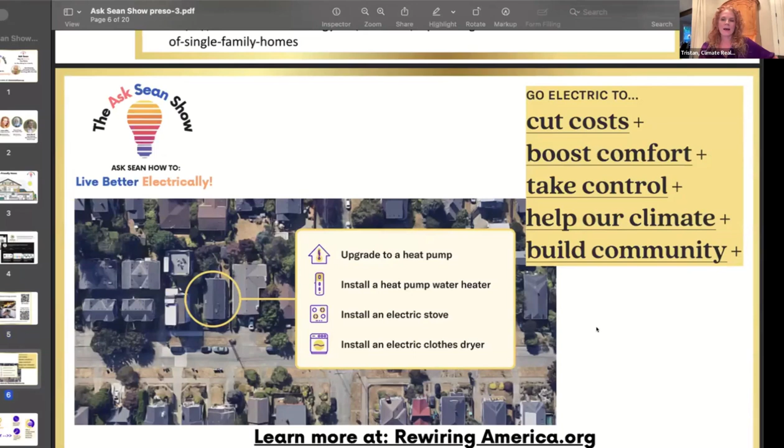And why do we electrify? There's so many reasons why we want to install a heat pump or a heat pump water heater, an electric stove, all those — we want to have our comfort, cut costs, take control of our energy needs, and help our community. It's also for our health.

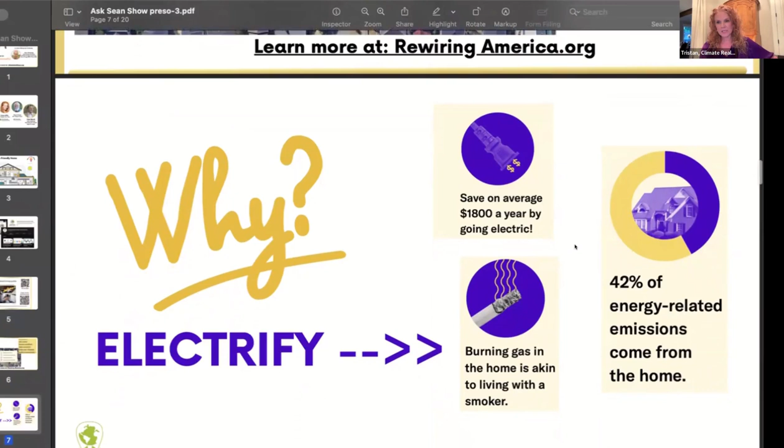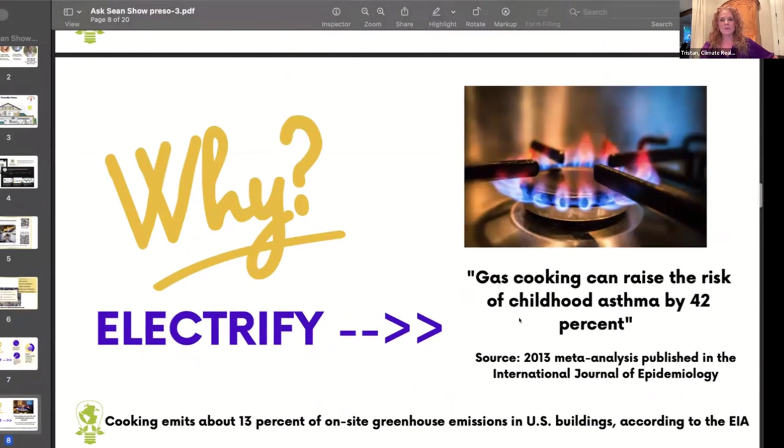We save tons of money on our electric bill. We also improve our health. I've had friends that when they switched out their gas stove for an induction stove, their children's asthma almost went away. So it's really an incredible story there. And as I was bringing up, the whole health of our homes is driven by getting rid of gas in our homes and electrifying.

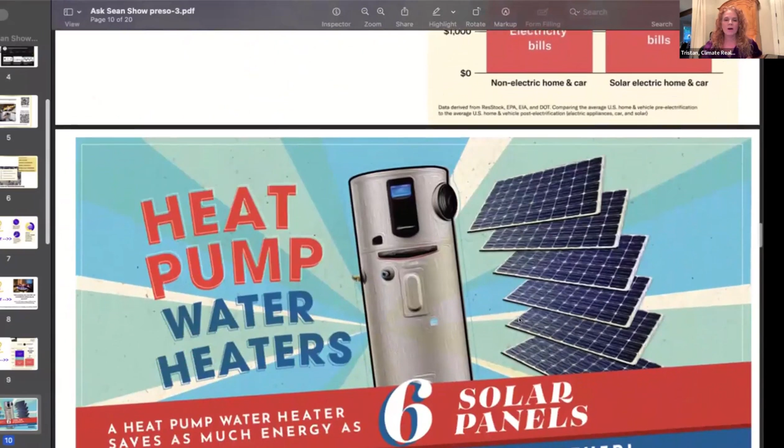Here's a chart that shows the kind of money that you can save when you electrify. This is on rewiringamerica.org, which is a resource we'll be sharing with you. Also, a heat pump water heater is almost like having 6 solar panels.

Hold on, turn it off here. Whoops, let me mute somebody. I think Kat needs to mute.

I got you. And this is Wendy, who was on our first show, who we helped get her very own heat pump. Here she is hugging her heat pump as well, and how after watching the show, she felt more secure and confident about getting a solar company, changing her electric box, her electric panel, and getting a heat pump water heater. She sends huge thanks and has been on our show several times since then.

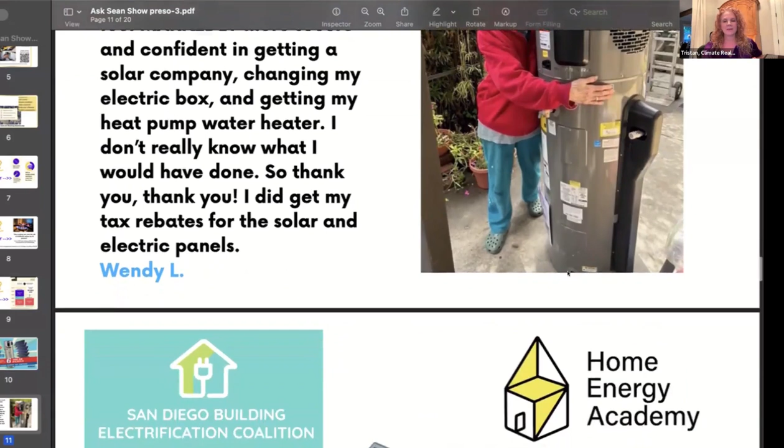And today we're going to be checking out Henry's house in Oakland, California, built in 1908. So we're going to let Sean take it away.

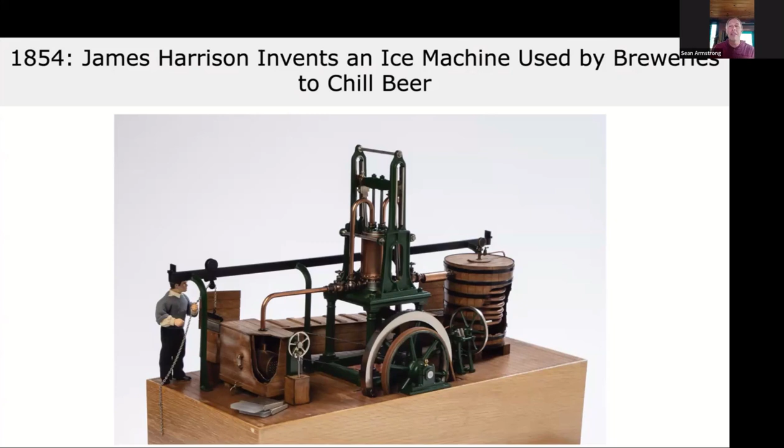The world's breweries use it to make ice to keep beer cold, and they were the number one innovators and investors in this vapor compression cycle technology. It used to be fossil fueled—they were running huge motors. But today we use electricity. And these two go together.

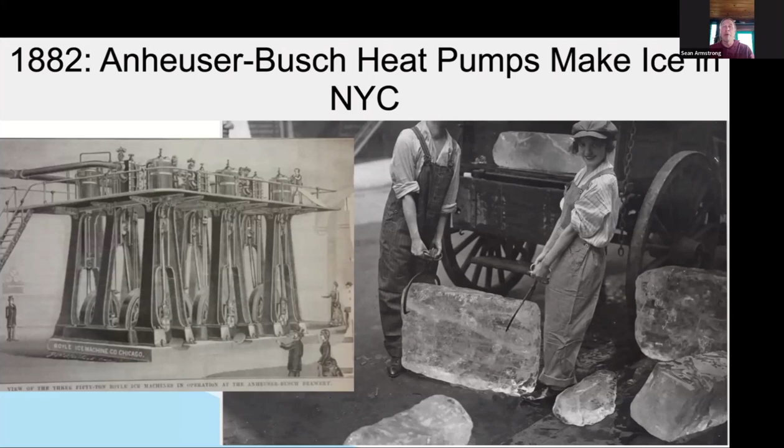Using a heat pump to essentially collect energy from, say, water that you're freezing, or collect it from the air that you're trying to chill—collect the heat out of the air. That process, you can also collect heat from the outside air and bring it in, and that allows you to really collect sunshine energy and bring it into your house, the warm air from outside. So it's a way to get renewable energy into your life. How do you get sunshine into your water heater, sunshine into your space heating? Use the vapor compression cycle to pull heat in.

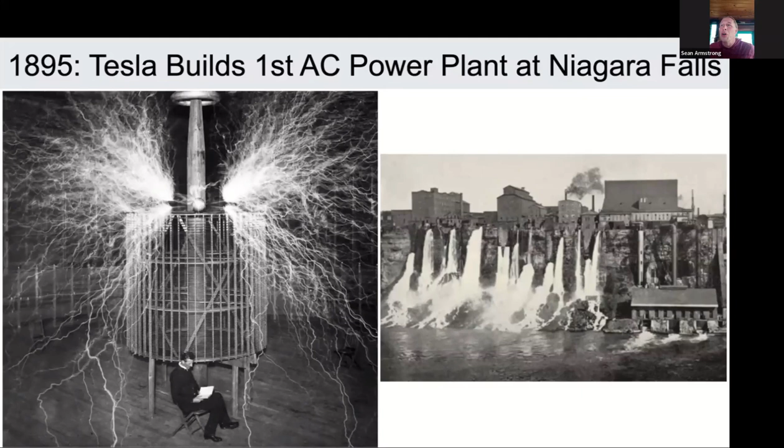Okay, we'll give a little credit to Niagara Falls. It was one of our first hydropower plants in the United States, and Tesla was hired. You see him sitting there next to this Tesla cage, once again demonstrating different ways to use electricity safely. You can see the power plants there on the right-hand side that Tesla built.

So here, transportation electrification. This is a big deal to understand where we were and where we're going. In 1894, the longest distance vehicle on the planet was electric. It could win a 5-mile sprint. And they had 600 of these electric cabs in New York City. They would take them to an ice rink and trade out batteries.

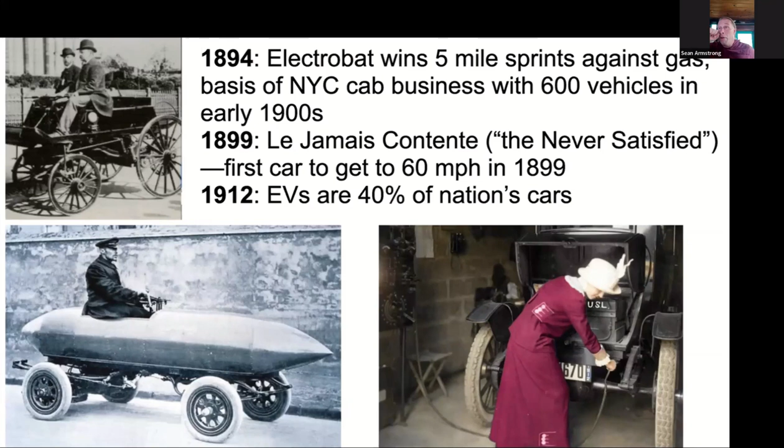In 1899, Le Jamais Contente, the 'never satisfied,' was the first car to reach 60 miles per hour. Then in 1912, 40% of America's cars were electric. We were almost there. Then spark plugs came in, I kid you not, meaning no longer having a hand crank but instead having a battery. So essentially making cars hybrid was a way to solve a lot of the issues hassling gas vehicles that didn't have a way to electrically explode gas. So hybrids we've had ever since have been part electric, part gas.

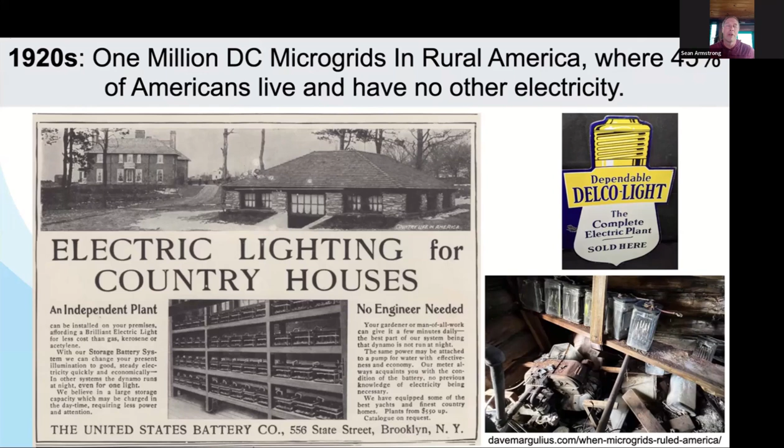Next slide. In rural America in 1920, 45% of Americans didn't have electricity, and they lived in rural areas—only about 1 in 10 rural households had electricity. So there were 1 million microgrids in our country, huge battery banks in people's homes, fueled by a gas generator or a wind turbine that stored electricity in batteries, giving them lighting at night, which was the big one. Everyone wanted electric lighting.

It was a huge relief. Heat waves today are 6 to 10 times more common than when I was born, depending on the study, but it's a lot more heat. So I'm glad that we have air conditioning. Next slide.

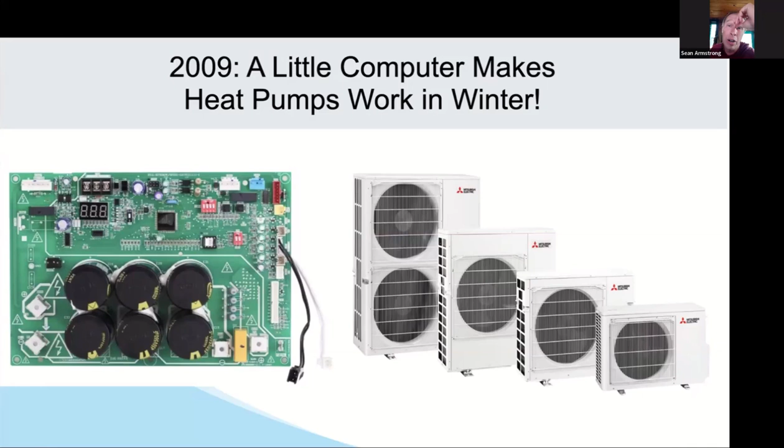Well, when computers got added to air conditioners and heat pumps, which are reversible air conditioners, that meant that they could work in the wintertime. They could have the fan speed up and the compression cycle speed up with a computer. Whereas before it was just single speed, like an old-fashioned bicycle that you just stomped the brakes on or you went forward - that's how old-fashioned air conditioners were, either on or off. But with a computer, now you can set whatever temperature you want inside, and it can accelerate or decelerate the process of collecting heat so that it can operate outside down to -30 Fahrenheit and during incredible heat waves up to 135 degrees Fahrenheit. Old air conditioners would die at about 110, 115. So computers are letting us stay in our homes during bad heat waves these days.

I want to show you how important this is. The gray line is the electricity demand over the course of a day from pre-retrofit homes in Sacramento, 700 of them. You see the peak happening at 1600, 1700 hours, like 4 to 5 in the afternoon - that's the peak for air conditioning.

Sorry, the orange line is the pre-retrofit summer peak. The gray line is the post-retrofit line, after they put in a computer-based heat pump, where the peak in the summertime goes down because it's operating more efficiently. The blue line represents how, in the wintertime, there's now an electric peak in the morning - people heat up their homes when they wake up, and you see a morning time winter heating peak. What's important is that because the computer is so efficient, not only is the gray line in the summer lower, the blue line in the wintertime is still lower than even the gray line in the summertime, and obviously lower than the orange one.

What it means is that these old-fashioned air conditioners, when replaced by a modern computer-driven heat pump, it helps the grid. It makes air conditioning more efficient, and the new winter electricity load is smaller than the air conditioning load, meaning our grid is still sized - all the wires and components are sized right - for electrifying our homes with heat pumps. This is a great 700-home example of how the greater efficiency of modern heat pumps helps the grid. Some people think electrifying your house will harm the grid. No - like 80 to 90% of Americans have air conditioners, and installing a heat pump helps our grid by reducing their energy draw.

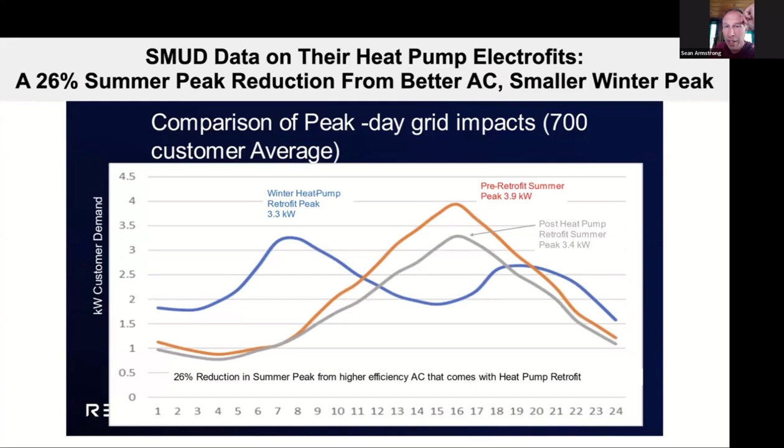I love this. The Propane Education Research Council freaked out in 2014, hired consultants, and in 2016 this came out - a map showing in yellow every county where fuel was going towards electricity for space heating and water heating, and it's everywhere. This is before there are any policies. It was just market driven because it's cheaper to build all electric.

It's thousands, if not tens of thousands of dollars cheaper to build all electric, and it's simpler, goes a little faster, because every appliance is electric, even if it burns gas - it has electricity delivered to it. So you have to wire to every appliance in the house, and then you have to add gas in new construction. If you just made it all electric, you only had to wire and then you're done. So you see the natural phenomenon in every state.

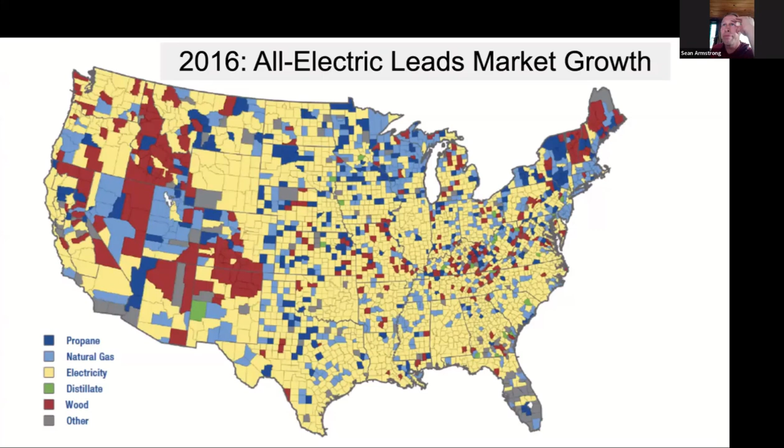Same story - people, because we have democracy in our cities, had the ability to pass laws to ban gas. We got 80 cities to pass them. Then Trump appointed judges who overruled us in California, and judges on the East Coast overruled them too, saying it is legal for cities to ban gas, particularly for air pollution reasons - that's within their public health and safety charge. The city of San Francisco still bans gas in new construction, even though the court ruled on different grounds for different laws that you couldn't. There are ways around it.

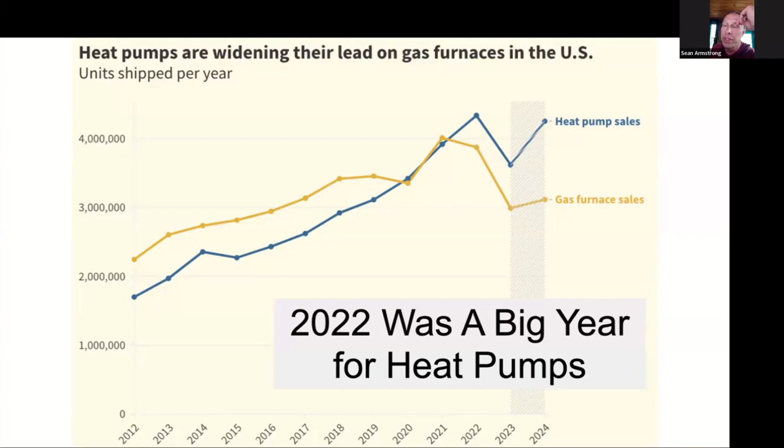This same illustration is true globally. Everywhere in the world we've woken up to the fact that electrification is how we get rid of fossil fuels and save our wildlands and our oceans and so many different things impacted by climate change, and our own health and safety.

And this is also happening in California for vehicles. I started off showing how electrification and vehicles worked together. Then we had a long period of hybrid homes - both electric and gas - and hybrid cars, with batteries and gas. Now we're moving fully back into electrification.

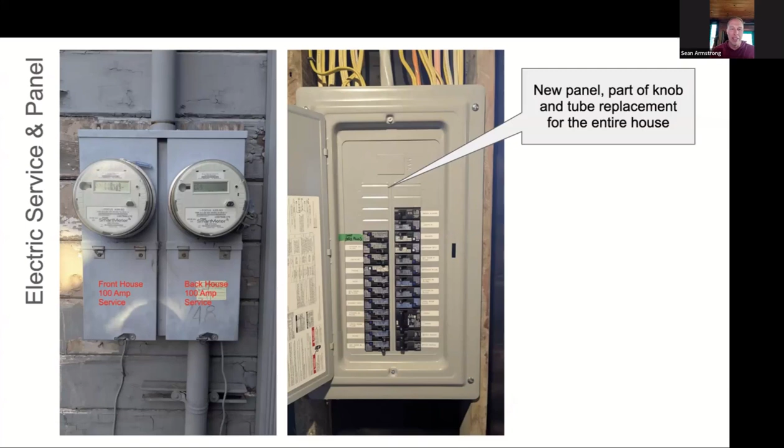Exactly. Okay, then we'll do the next slide here, noting that these are 100 amp services, right? They are, though I don't actually know if they're limited by the wire size—the meters themselves might be higher, but there are 100 amp breakers in each sub panel. In the actual sub panel, about 15 feet from the main service, we had to replace all the wiring in the house because it was knob and tube. We have a large basement, so it's relatively easy to work on. But we have 5 or 6 panel slots left, which is hopefully helpful. That makes it—if you didn't have that, you could put a different panel there for more slots, or put in micro circuits, so one slot has 2 circuits instead of one. There's ways to avoid replacing that metal box, but it's not a nightmare if you did. Okay cool, let's do the next slide—this is what I wanted to show you, a few options.

One way you can plug in anything you want, no matter how powerful, is to use a smart panel. On the left-hand side, there's SPAN. SPAN makes 50-amp and above panels. So if you had a 50-amp panel, you could put in a 50-amp SPAN panel and plug in about 150 amps of stuff. If you had a 100-amp SPAN panel, you could install roughly 300 to 400 amps of stuff into it.

In the middle you have Lumin, a different brand, different cost, same idea. It goes down to 30 amps in this case. You can use it as a sub panel. 30 amps is what you'd power it with, but you can plug in 150 amps of stuff into it.

The deal is that it's extremely rare for everything to be running at the same time at full power. Usually, while you might have 100 amps of service to your house, the 15-minute peak on your house, according to the averages we've seen, is probably like 34 amps in the worst-case moment of the entire year, and usually more like 15 or less.

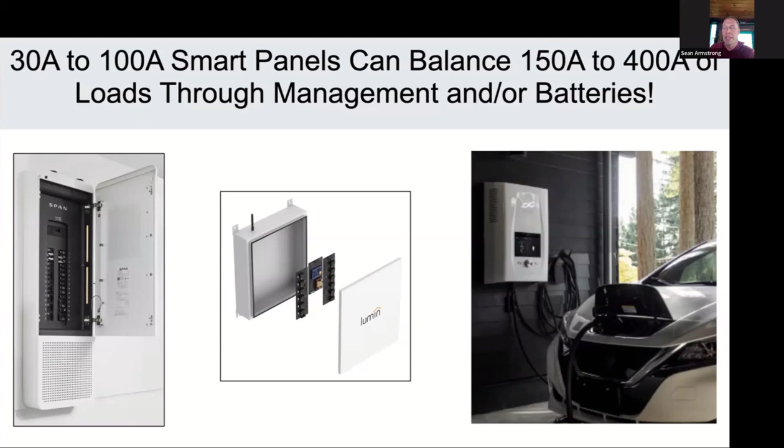These are just smaller versions of that smart panel. These balance 2 circuits instead of all of them. I showed you the one on the left-hand side, the NeoCharge, which balanced the stove and the heat pump furnace in the larger of the 2 homes. These are other examples: Dryer Buddy, SimpleSwitch, Splitvolt, Thermolec DCC, Evduty—all the same thing, where either one circuit or the other is using the electricity, or both at the same time.

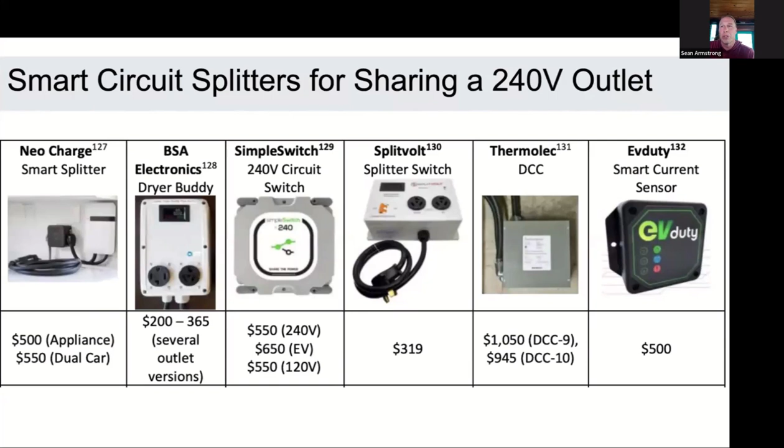The NeoCharge on the left-hand side is a smart one, as is the Thermolec. The other ones, it's just one or the other—SimpleSwitch is a great example: you can either run the stove in that case or the HVAC system. But NeoCharge lets you do both, unless you're using more electricity than the circuit can support, and then it turns off one of them for you.

Okay, next slide is back to you, Henry. But do you have any questions about these smart panel options I just showed you as one way of approaching this? No, very helpful. You betcha.

This slide is really just to show that we've made some of the electrification upgrades already. I installed a heat pump hot water heater. Relatively straightforward, it works great. I had to replace the circuit board because apparently all of them from Rheem are going bad.

And then we put in a heat pump dryer as well. No vents, we didn't have to cut a 4-inch hole in the wall, and it drains into the same drain that the washing machine does. That is so beautiful.

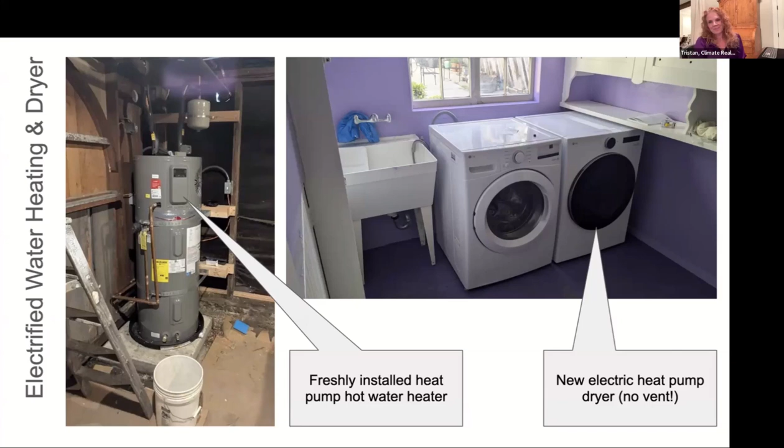And then I want to show you water heaters. So Rheem is the one in the middle that Henry installed. Rheem has gotten a bit of a black eye recently. They really struggled during the pandemic with a lack of access to fans and computer parts, etc. Tons of their, I think, Generation 4 units have come up with complaints, because there was a lack of access globally to fans, which is a critical component of all heat pumps, as well as other circuit boards.

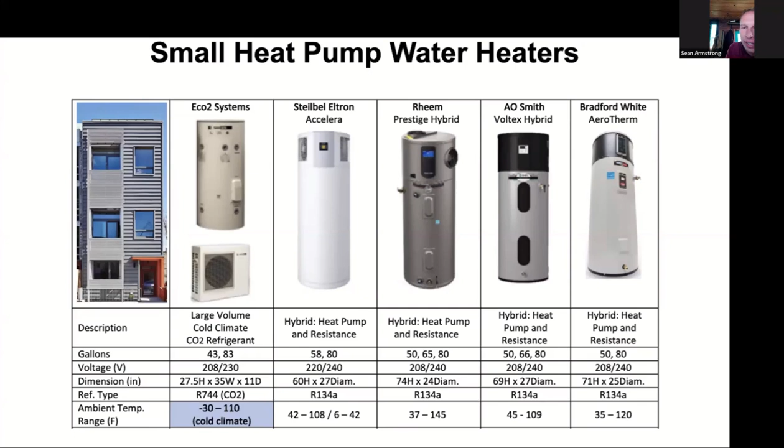There's Bradford White, Stiebel Eltron over on the East Coast, and then the Eco2 or Sanco2 on the left-hand side. Those are if you have a gigantic bathtub, one of those huge eggshell bathtubs where a standard tank of hot water isn't going to fill it, and you need something super big. Those were designed in Japan for their 100 to 150 gallon sitting tubs. So that's a Japanese fancy heat pump water heater just for really big bathtubs. You already have that handled, Henry. I just wanted to let other people see some options.

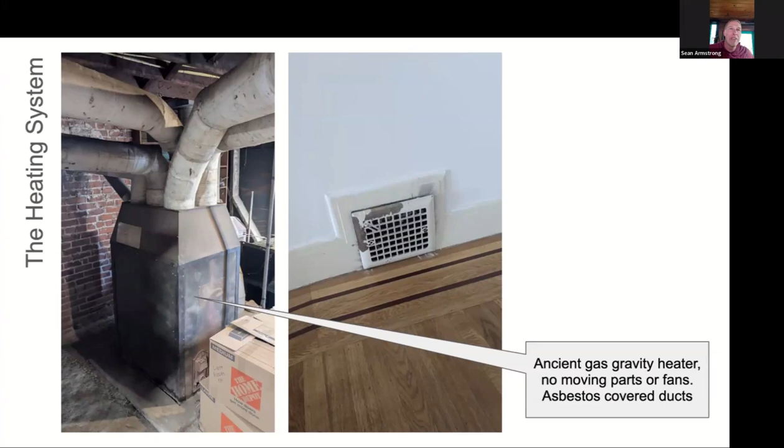And you can't do that with what you have. With what you have now, the whole house gets more or less the temperature that you want it. So when you go to dedicated fan coils like this, you have a remote controlled thermostat and you control zones, and you can split up the house as you wish.

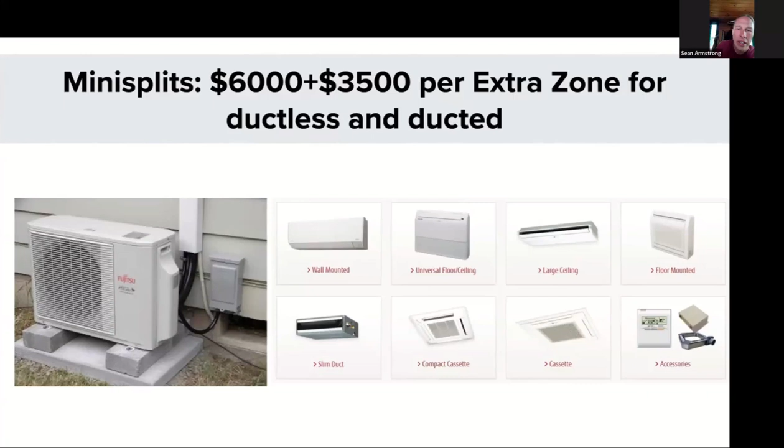Is there concern about air return on those? Because there might not be good return pathways, or there might be, I don't know. No, you don't have to really worry much about the returns on those. They'll each have their own dedicated air supply, a return, air going into it, and then the air goes out. So let's say you have that nice big basement. This would sort of sit right next to that register, and its air intake would be more or less like the back of that box. You'd no longer be using your ductwork that has a bad air intake. You'd be using this device with its air intake right there. Great.

Okay, so then you're on that next slide. Oops, no, the one previous to that, please. So your house, your old super leaky house, how many square feet did you say it was? About 1,600 square feet.

So you want a 3-ton heat pump, 36,000 BTUs, and that heat pump might be too big for your house after you insulate it. It's nice though, because the ones they build today with computers in them, it's not too big, it just turns itself down. Your goal is to get a computer-driven heat pump, not a single speed or a dual speed, so you get a 36,000 BTU heat pump, and it can turn down to say 10,000 or 12,000 BTUs, which is great, before it has to short cycle, meaning turn on and off. So I think this is probably the right solution for you.

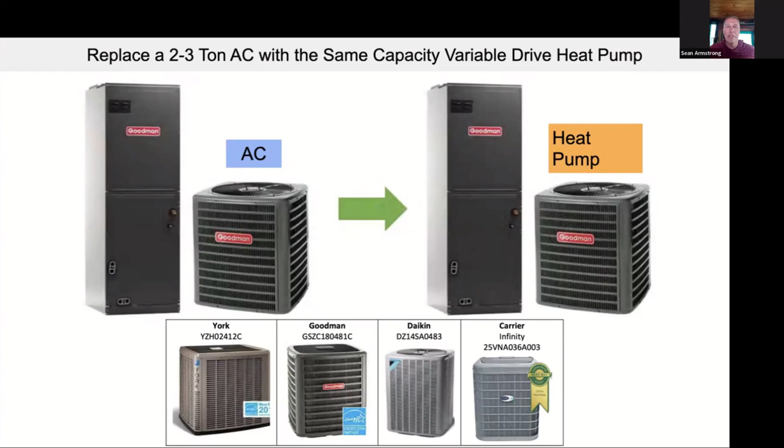Okay, let's go to the next slide, your stove. Yeah, I guess the only gas left in the house is the furnace and the stove, and we kind of took everything out of the kitchen, so it's a free-floating stove. I think we have a lot of flexibility there, and you can kind of see we put some temporary tables beside it.

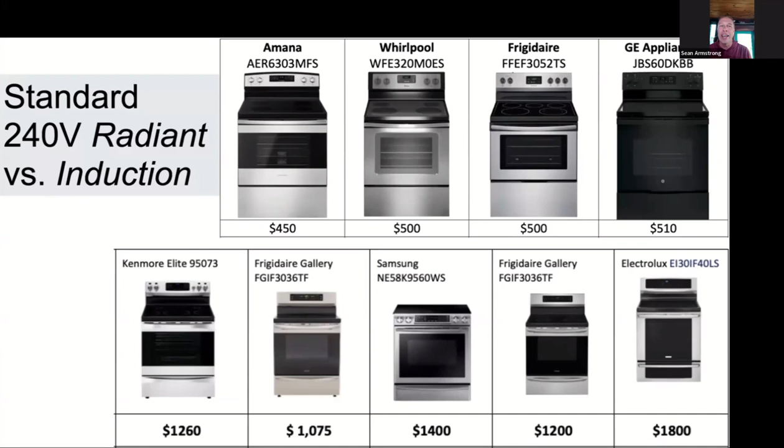And that is my last slide, and we're right at 6:30, so do you have any questions, Henry? I appreciate all the input, especially on the HVAC. That's going to be the challenging one, I think.

Well, stay in touch, send up bids when you get bids for them, and I'll review them and point out, like, well, they're proposing a 4-ton system. I mentioned that you don't need more than 3 tons, and every ton is like $7,000 of installed cost. So when the HVAC contractor comes with the most expensive part of electrification, 3 times, 4 times as expensive as any other thing you're going to do, and they oversize your system oopsie whoopsie such that they get thousands of dollars more profit for the exact same amount of work that they did, that's how you lose your shirt. So just insist that you don't want more than 3 tons, you don't care what they say.

Appreciate that - I think that's the type of conversations I'll be having. Well, I have a friend trying to meet me for dinner here in town. Is there any other questions from folks before I jump off? Real quick, I don't know if there's anything else.

We'll send some more ideas for inverters. We shared some - people wanted a cost range for the inverters. Inverters are like 2 to 3 grand in my experience.

Kat says she's using an induction cooktop on the counter with 120 volts, a 2-burner, and only one would work full force, so cooking 2 pots at the same time isn't realistic, but she didn't have to switch to a 240 volt circuit. I wonder which brand she's using. With 1800 watts split into 900 and 900, in my experience my food fries to the point of burning at about 600 watts. I can't cook with much more than 600 watts for most of my stuff - 900 watts is certainly more than enough. When I'm boiling, I like to have all 1800 watts because it goes faster, so with 2 burners it's not as fast, but it's literally just as fast as a gas stove. 900 watts on induction is as fast as a gas burner on full blast, probably even a little faster, but no slower. So I feel like I have 2 gas burner equivalents when running them at the same time, and it's still more controllable, easier to clean, and safer.